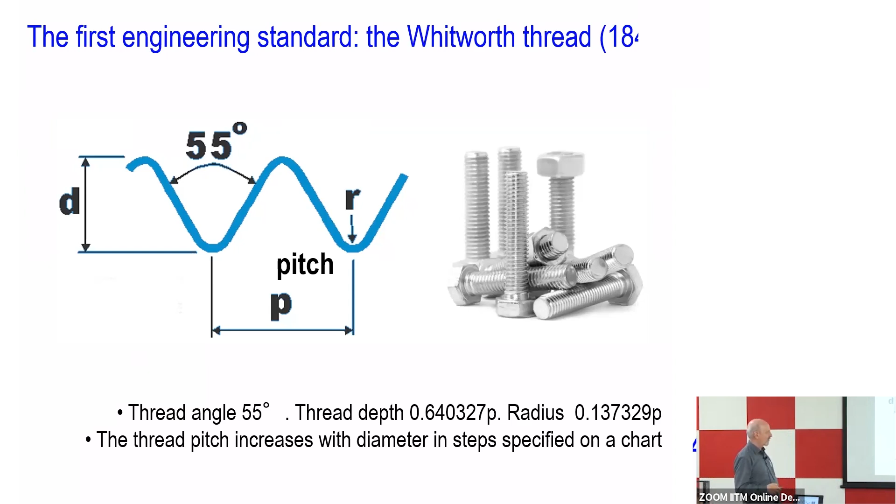Okay, so what a standard means, and I'm going to spend some time discussing with you what is a standard. So a standard originally means a banner, like you go with a banner and then the others follow you, and that's a standard. So in a battle, or in the past at least, everyone will look at the banner, whether it's there, whether it's not there, and that will orientate the different actions.

So that's why the term standards comes from the military world, but then also the meaning of it is all standing for the same, and therefore keep in mind that the notion of a standard also embodies a degree of leadership, okay? So if I propose a standard and everyone follows me, that means that I am in a position of leadership. If the French Revolution proposed the metre as the standard for a distance, then that means that, you know, they had a kind of leadership in the field.

And so keep in mind these two aspects. One of them is a standard is something that everyone recognizes as significant, and also a standard means that the one that holds the banner has a degree of leadership. So what is a standard in engineering? So there are some features of standards.

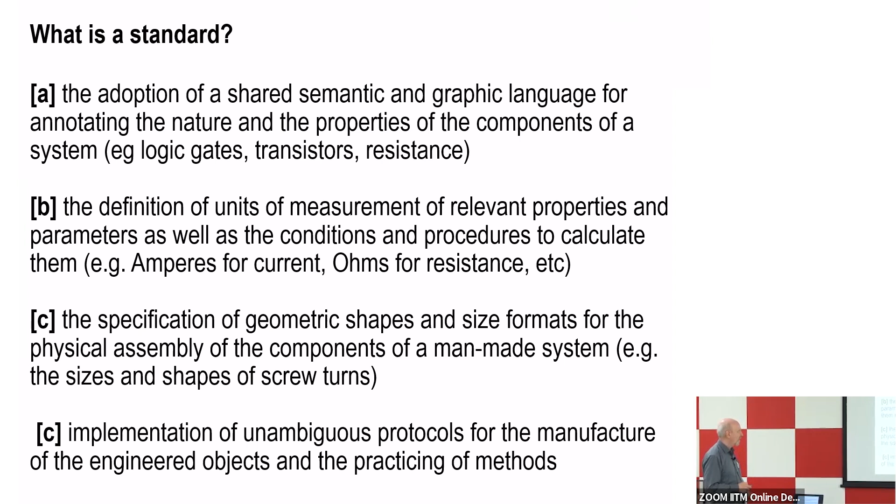So what are standards good for? And again, we are still in the realm of engineering. Well, a standard, first of all, enables the abstraction of the properties of the component of a system. If we say I have 5 amperes, you don't talk about the electrons, you don't think about the kind of material, but you just have that idea of amperes. They also enable a precise description of something in a standardized quantitative language. If I say the measure here is, I don't know, 70 centimeters, you know exactly what I'm talking about.

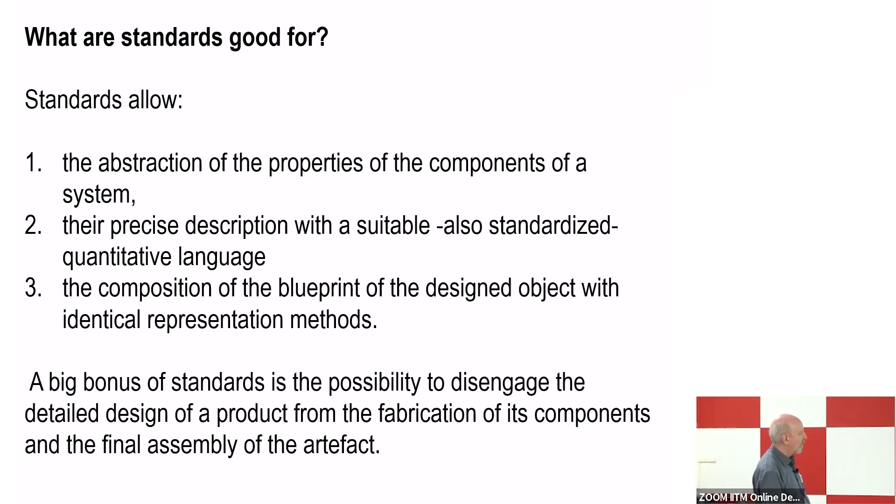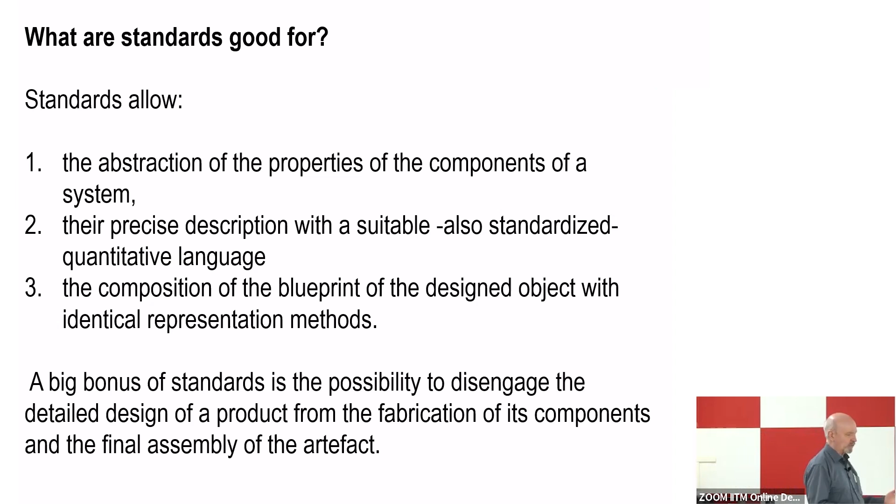And also, because of this graphical aspect of standards, you can represent the composition of an object with identical representation methods, okay? So if I make a logic circuit and I send it to China or to Singapore, it doesn't matter, they will understand exactly what is the content of that particular blueprint. And as I also mentioned in passing the first day, a big bonus of standards is that you can disengage the design of a product from the fabrication, from the final assembly, from the distribution. So this is something that is inherent to the value of standards.

So what things can be standardized? Okay, there are some things that can be standardized in engineering, and as you will see immediately, some of these things that can be standardized have an instant kind of projection in the biological world.

So for instance, you can standardize the physical assembly of the components of a system, for instance, geometrical shapes, dimensions, boundaries between elements, compositional rules. This is something that can be standardized.

Also, you can standardize the metrology, the way you measure things. You use a given technology to measure relevant properties, to calculate units, to give reference values, to examine tolerance and allowance. This is something important that I will return to in a moment. It allows you also to measure or to consider context sensitivity, transfer functions.

Okay. You can also standardize the manufacture of engineered objects. And there is an international organization called ISO, the International Standards Organization. That is the international body that will give a stamp so that industries can follow given procedures to produce given things. So you say, well, this object has been produced following a standard ISO 300-475. Then that is a very established procedure that can then be reproduced by many others.

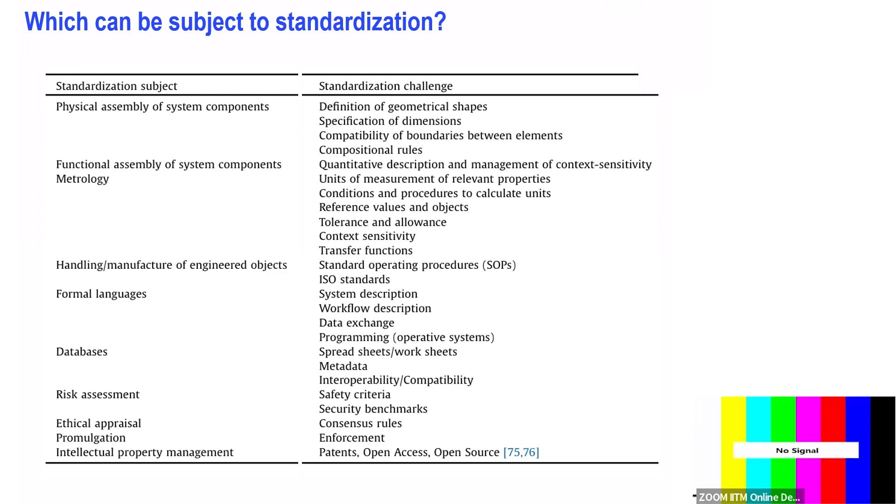And also we can standardize the way we handle intellectual property. And as you know, different treaties deal with knowledge protection through patents and open access and all these types of different agreements and so on.

So the essence of this is that you have a bunch of possibilities to apply standards to. If you apply them, then things can go much smoother, but there must be an agreement in the community to do that. And this agreement sometimes emerges from the bottom up, so it is the community that agrees to follow a given rule or a given standard, but sometimes it is imposed by brute force, okay?

And the typical example is the metric system, which was mentioned in passing the other day. The reason why we have the metric system in continental Europe is that Napoleon conquered most of Europe and imposed by brute force that all countries had to follow the metric system. Before that, every country had a different system. Spain had one, Austria had one, Germany had one. So he said, well, this is a mess. So from now on, either you take this standard or you might be in trouble, okay?

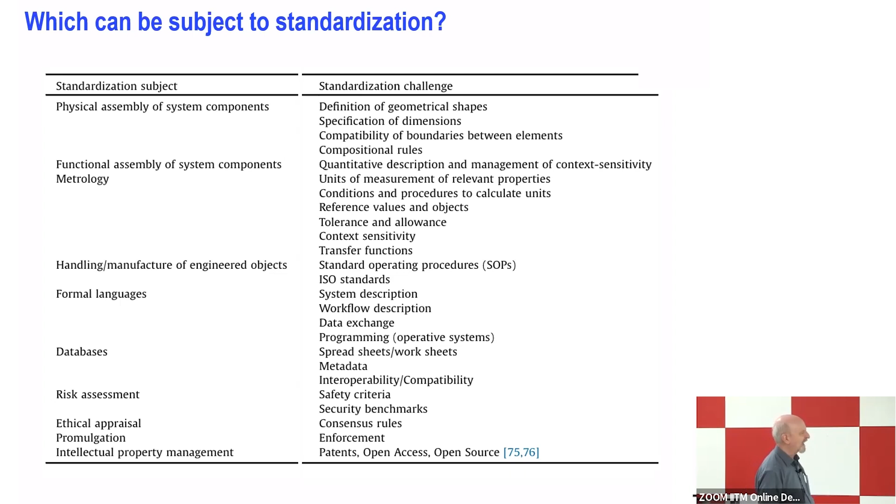And this tension between standards that go from the community up, and standards that are imposed by brute force, is something that happens also in some cases in synthetic biology, as you will see later.

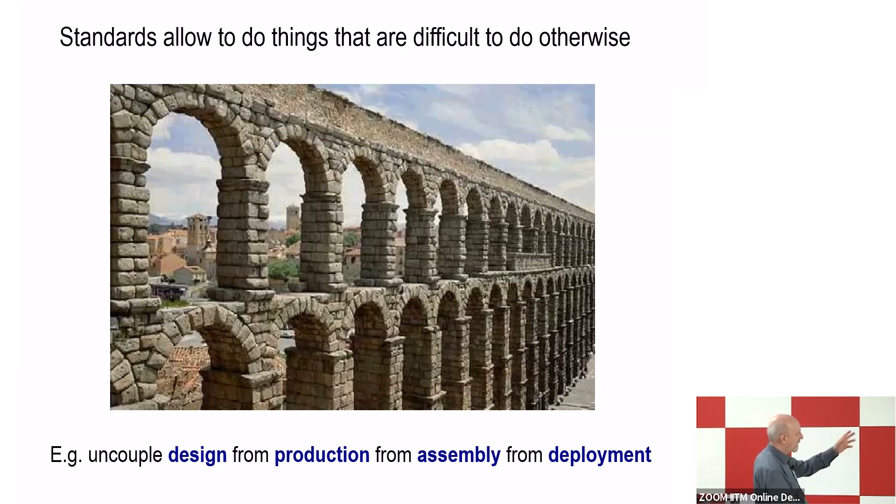I showed you this slide before. This is an early example of civil engineering. It's an aqueduct in a city close to Madrid in my country, in Spain. And you can see that every block here follows standards of size, of angles, of periodicity, and so on. And thanks to that, it was possible for the Roman architect to design the thing, to produce the stone somewhere else, to assemble them somewhere else, and then deploy the thing somewhere else as well.

Okay, so as a consequence of that, and this is something that I mentioned in passing the first day, you have to reshape the way you look at biological systems from the perspective of synthetic biology. In biological systems, the frame that enables us to understand what is going on in living objects is the so-called central dogma of molecular biology, where you have DNA, RNA, proteins, and metabolism, and a flow of information all the way from DNA to proteins and eventually to metabolism.

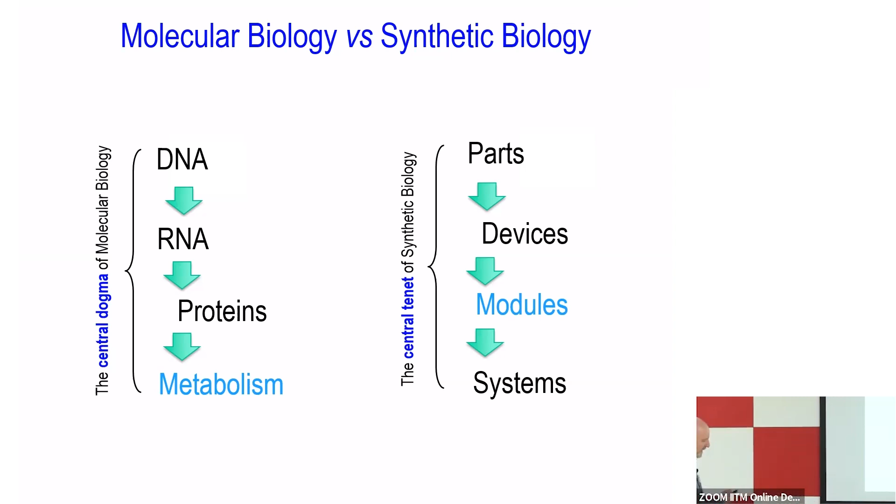Well, in synthetic biology, it's good that you keep that in mind, but this is not very useful. What is really useful in synthetic biology is this part here: biological parts, once they are composed, form devices. Once the devices form, they can be assembled to form modules, and eventually modules can form systems, okay? So this is a different perspective of the same thing.

And in practical terms, what you have, and this is a bit abstraction, then this is a lesser abstraction, still an abstraction, because you have this biosensor module that has the regulator that receives a signal, in many cases an inducer, and then it gives out pops, and then the pops enter into an operon, one or more genes, and then at the end you have a pathway. That is what you want, and at the end you have to have a terminator. So this is the kind of super typical, super basic synthetic biology device.

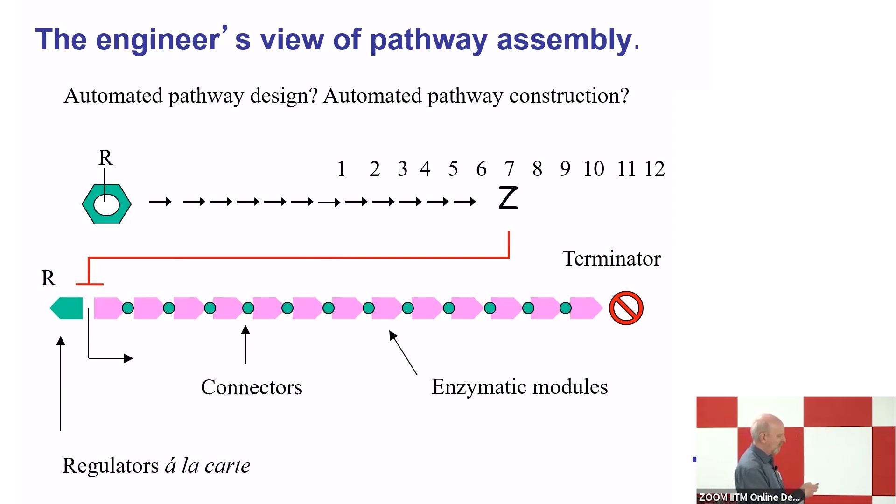You say, well, to go from this to here, I go to the literature and I need all these enzymes. I go to the genes, I clone them, I put them in front of a strong promoter, and bingo, it should work. Okay, well, this is in many cases what we kind of tell the world, but ladies and gentlemen, things are not so easy, right? So in many cases, we think that we are doing fantastic, but we are not doing fantastic, okay? We have to be careful about that.

Okay, why are we not doing very well? Well, mostly because of these four reasons. Number one, biological components are context dependent. I just mentioned that. Also, don't forget that we are talking about biological systems that are alive, and therefore they are subject to Darwinian evolution, okay? So that means that they can mutate, and the mutants in some cases can be more successful than the constructs that we make on purpose.

But also everything that we construct in a living system interacts constantly with metabolites and chemicals. So if we produce a protein, the protein does not appear out of the blue. It's all surrounded by a big concentration of other molecules, other chemicals, and other things.

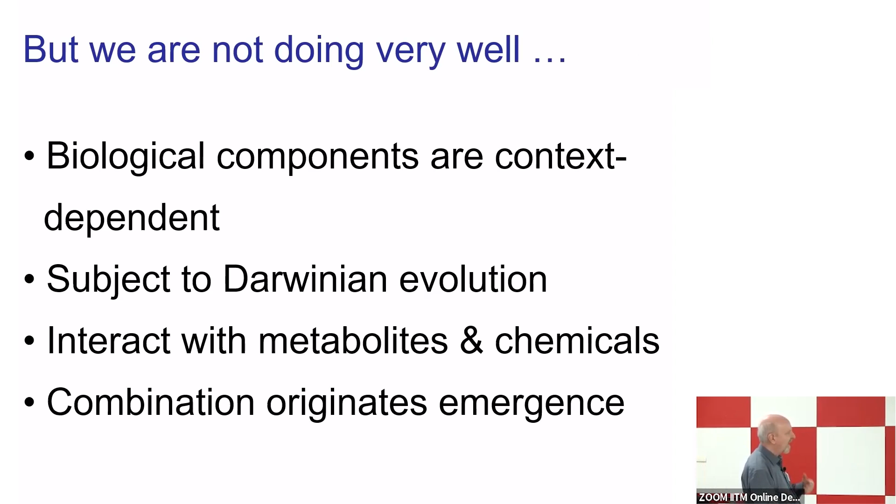And what is more worrying is that in biology, combination originates emergence. So it's not just that we have context dependency that may vary a little bit the input-output functions, it's that sometimes when we combine biological components, the outcome may be completely unexpected. So it's not that one thing is a little more, a little less. So this is a serious problem, a fascinating problem that goes as follows.

In mathematics, 2 and 2 is 4, okay? No discussion about that. In engineering, things are not so, because, for instance, when you make a screw turn, if the receiving part had exactly the same dimension as the other, it would not work. I mean, you need to have some little space between the two to make them fit.

This is something I will return to in a moment. It's connected to the allowance of standards, but in engineering, things are close to mathematics, but they're not mathematics. But in biology, 2 plus 2 may be 4, but then you have this phenomenon that is emergence. Emergence is that you don't know what's going to happen. You cannot predict what's going to happen when you put these 2 plus 2 together.

So sometimes you combine one gene and another gene, and you think that something is going to happen, and what happens is something completely different. You put this enzyme and this other enzyme, and you predict that the result of these two steps will be one specific reaction, and then maybe the first enzyme will kill or inactivate the other. In other cases, it will activate the reaction, and in other cases it will originate a completely novel reaction that has nothing to do with the ingredients. So this is emergence, okay?

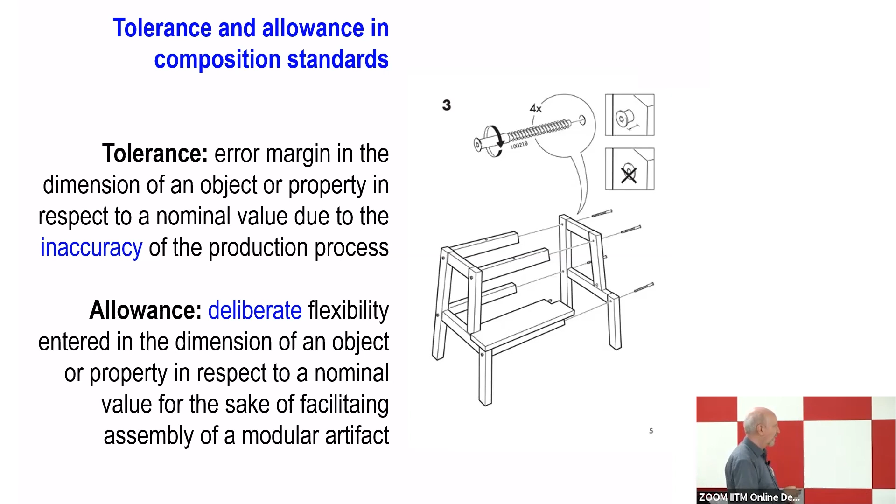But then we have this other aspect that is called allowance. So allowance is a deliberate flexibility that you enter in the dimension of an object to make sure that the two things fit together, okay? So when you have a screw component, and you have the receiving hole of the screw, if the two were absolutely identical, the system would not work. You have to leave a little room for the two things to go one after the other, okay? So this is something that engineers have known for a long time.

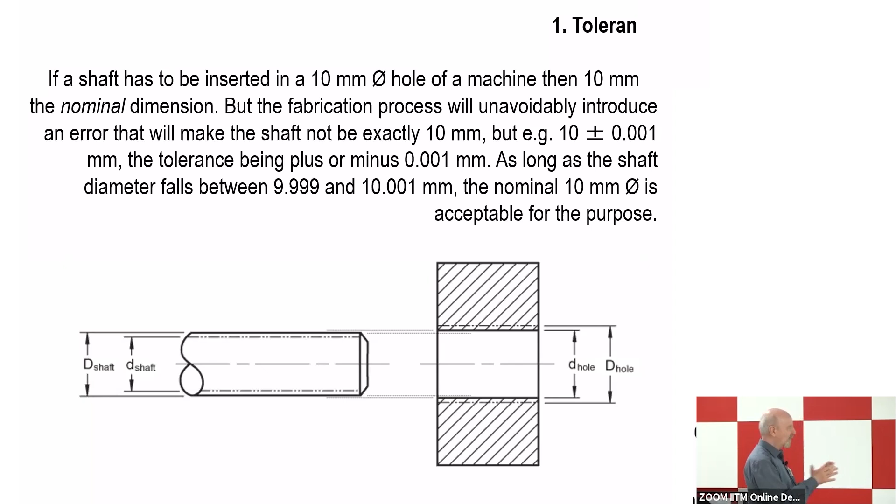And the thing is that, for instance, if a shaft had to be inserted in a machine and 10 millimeters is the nominal dimension, number one, there will be some error, and therefore the system has to be thought to tolerate the kind of error margins that are associated to the production process. And then by the same token, and I don't want to go in detail through this text, in many cases, to make the system work, you have to allow some margin, not of error, of room for the two things fitting together, okay?

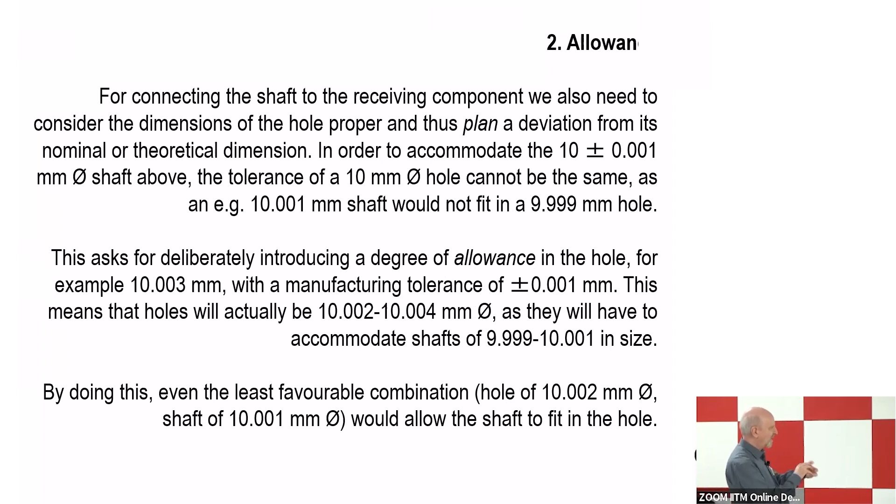Okay, this is for mechanical engineering, for electric engineering, and for the kind of engineering that we know on a daily basis. How can we translate this to the biological world? Because obviously, if we're talking about standards, we have to consider all these circumstances. Okay, so let's recover again this metaphor of the radio built with parts and see how far we can project these ideas about engineering standards to the biological world.

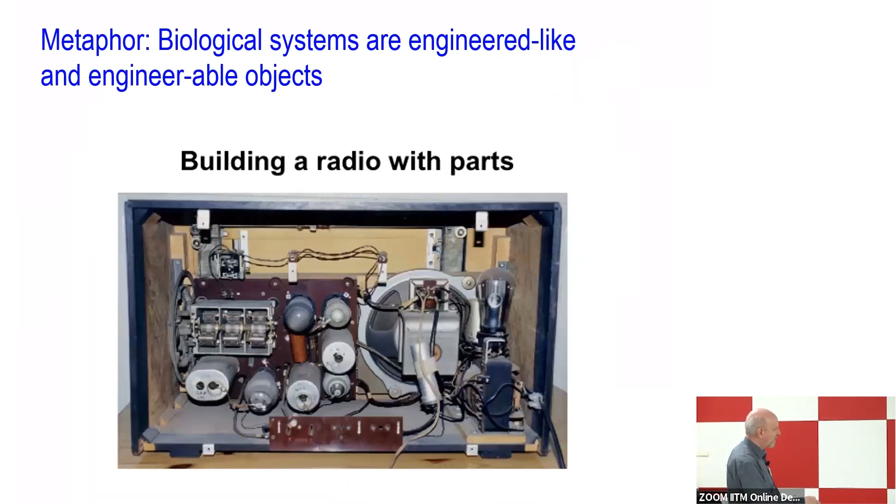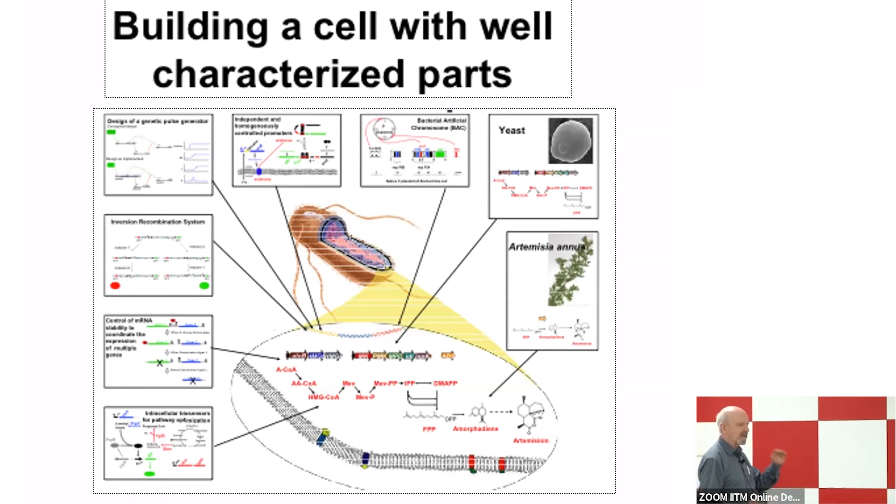This slide that I also showed the first day indicates that the radio has many components, many parts, and also cells from the perspective of synthetic biology can be understood as a bunch of structured, well-organized and well-characterized parts, okay? So in this case, the parts are transistors, cables, connections, bulbs, and then you have this speaker. Then in the case of a cell, you have genes, I'm sorry that the resolution is not good, but you have different types of molecules, you have controlling elements, you have a list of them, and the list is very long, but it's still limited, it's not infinite.

Okay, so we return to the star concept in synthetic biology, that is the concept of parts. So what is a part? A part is a DNA sequence that encodes one non-equivocal biological function. It has to be one, it cannot be 20, it has to be one. But from the perspective of synthetic biology, this is not enough. So the part has to be endowed with additional properties.

Number one, the part has to be composable. That means that the part has to be designed to make it amenable to further composition with other parts, with other segments of DNA. It has to be reusable. Reusable means that the part is good not for one specific purpose, but one day I use it for making this construct, then I take the part some other day to make another, and another, and another.

I can reuse the same part for various purposes. If I have a promoter, then I can use that promoter part for expressing, I don't know, beta-lactamase, but tomorrow I want to express a pathway for degradation of xylene, and then I can use the same promoter, and the other day I want to do it for expression of genes that deliver at the end some synthetic material. Okay, so it's the same part, and we use it in different contexts.

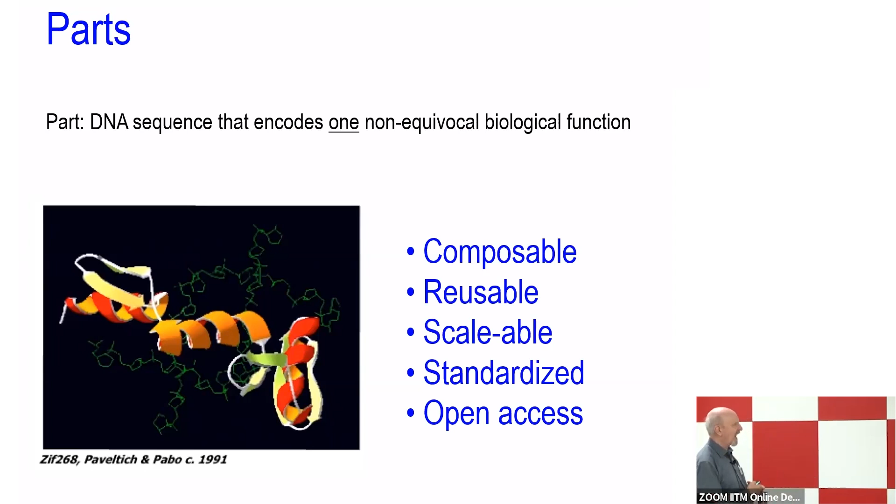Then it's scalable. Scalable means that you can use it in many different places. It has to be standardized, and I will return to that. And also, and this is important, it has to be open access, okay? Well, this is not obligatory. I wish it were obligatory, but it's not. But in general, the community of synthetic biologists advocate, including myself, that biological parts that are standardized should be made available to everyone without the limitations of intellectual property, patents, and all the rest of it.

So what is in a part, okay? In a part, you have basically three things, three contents. First, the DNA sequence, of course. If you don't have a DNA sequence, you don't have a part. Then the function associated to the DNA sequence, and also the activity figure. And the activity figure is a very important characteristic of a biological part, because if not, you are not in synthetic biology, you are before synthetic biology. So you need to have a sequence, a function, an activity figure.

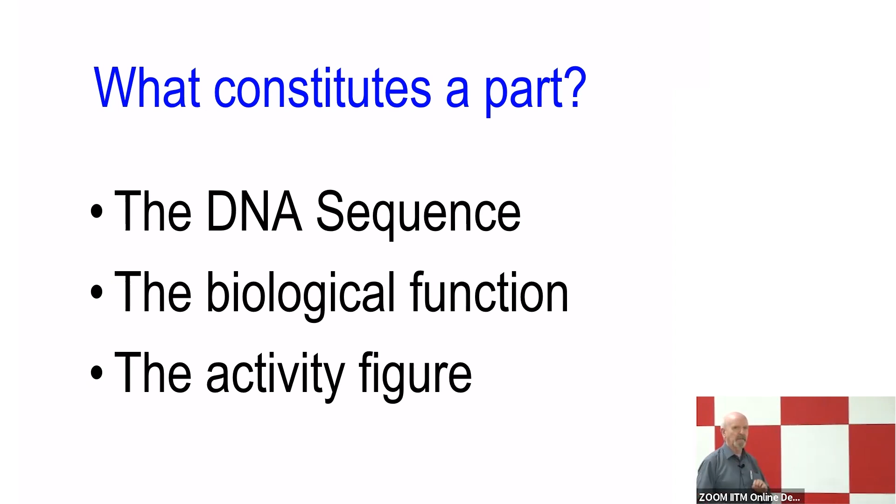For instance, I have this sequence of DNA. The biological function is a promoter, and the activity of this promoter is 2 PoPS. That's a super wonderful part. It's super well characterized, okay? So I'll show you how these parts can be abstracted and how far you can get with this type of definitions. And also, as is the case with electronic components, you can give them a code. So you have a list of parts that are encoded, not with the whole sequence, but just with a name that, again, is standardized and enables you to handle them very easily. So this would be the perfectly defined part, okay?

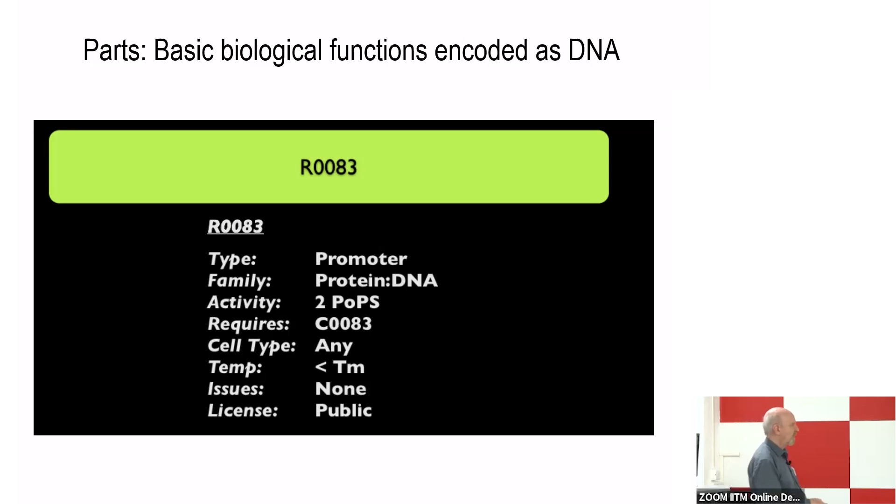So you have a sequence of DNA. The function is a promoter. The family it belongs to is the DNA-interacting proteins. The activity is 2 PoPS, then it requires this other part to be assembled. Probably this part is a plasmid or something, I don't know. Cell type, any, that means that it can go in any biological system. Temperature appears to be kind of lower than room temperature. Issues, none known. In principle, no one has found any problem with it. And then public, that means that everyone can use it, okay? So this is just one part. There are thousands and tens of thousands of parts that are characterized under this kind of nomenclature.

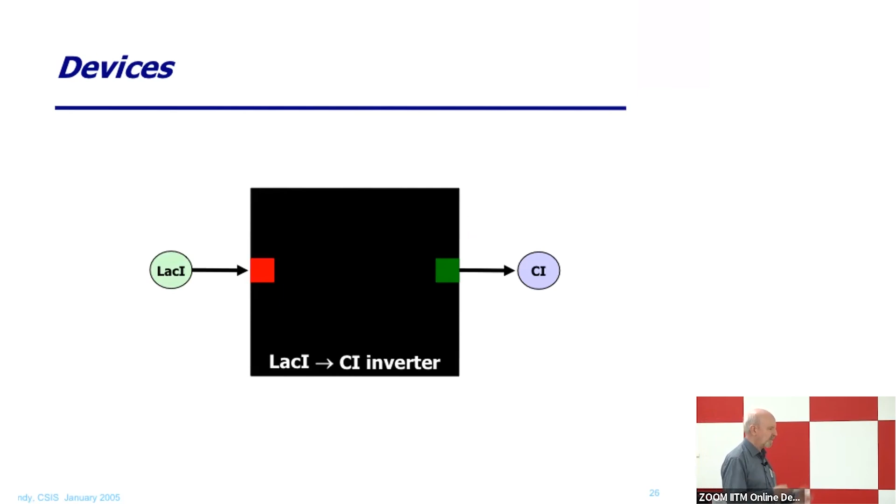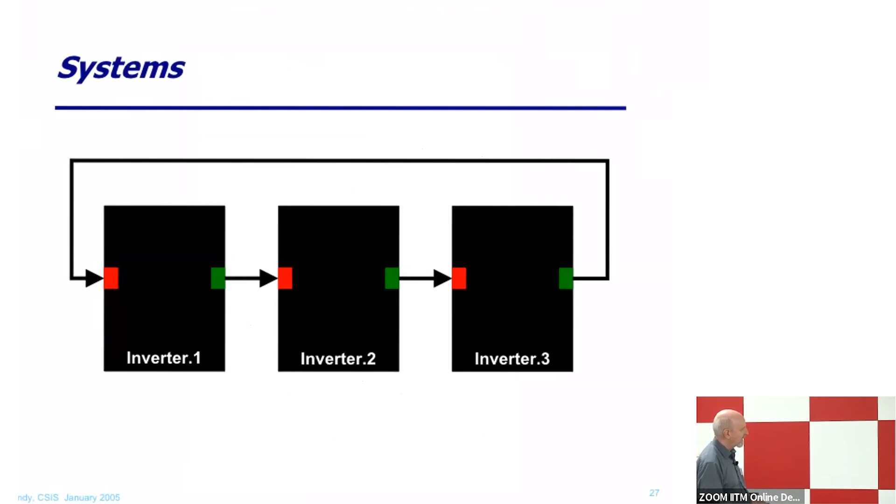Well, there are various initiatives, mostly in the US, with this idea of collecting thousands and thousands of parts and characterizing them in terms of inputs and outputs. This obviously for a human is impossible. It would be very boring to spend all your time making this type of characterization. But many of these operations to define the input and output values of a given device now can be run by a robot, in such a way that at the end, for every part, and there are thousands of parts, you can have a kind of information page where you can monitor and visualize all the characteristics and all the parameters associated to that part. And then with these characteristics and parameters in hand, you can go on and make devices and the rest of it.

So what I have told you so far is connected with the standardization of parts. But there are other aspects of synthetic biology that also deserve and have been standardized. One of them is the language. The main language for describing synthetic biology constructs is the so-called SBOL. SBOL means Synthetic Biology Open Language, and it is a language that has different degrees of depth, and is very useful because it enables you to describe genetic constructs with a language that can be understood not only by humans, but also by machines, by computers. So that's something that is very useful.

And the SBOL language is becoming more and more used by the community to have an accurate description of different procedures and different parameters associated to a given biological construct. So instead of having this soft wording of some biological phenomena and properties, with SBOL we have a very precise description of what is going on. Not only that, but there are some initiatives in the last few years to convert the SBOL language into a language that can be fed to a robot to run experiments itself. So instead of doing the experiments ourselves, we code the experiment in this language, and then a robot can run the operation without any human intervention.

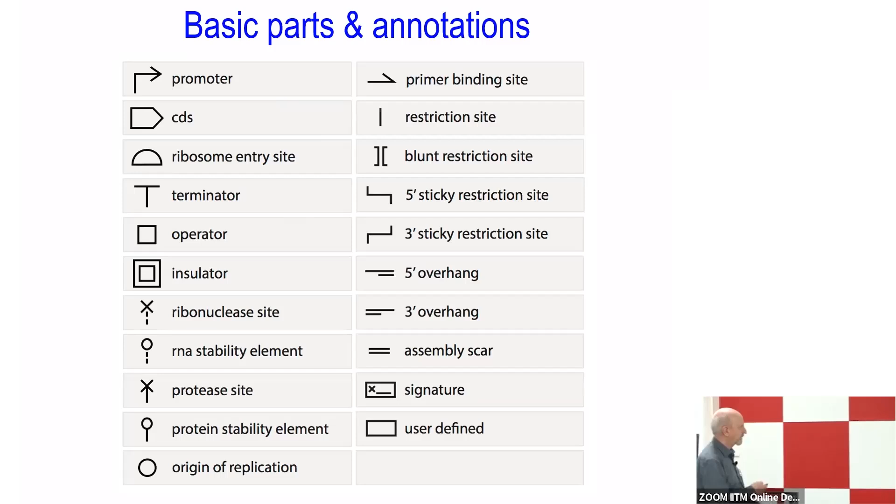So that means that when you say, well, I have a gene, I have a pathway, whatever, you should not use any representation that you fancy. Please always use standard annotations for graphical representation of your constructs, because that enables you to communicate the contents of your constructs to a much wider community that will not be confused by some whimsical symbols. Okay, so the next screw turn is that we have defined the parts.

We see that the parts have to be standardized, that there are some kind of characteristics and so on. But then where do we find the parts? Basically, parts can be made by any laboratory and you can have them, etc. But there is a major repository of parts that is found in association to iGEM. I will go to that in a moment.

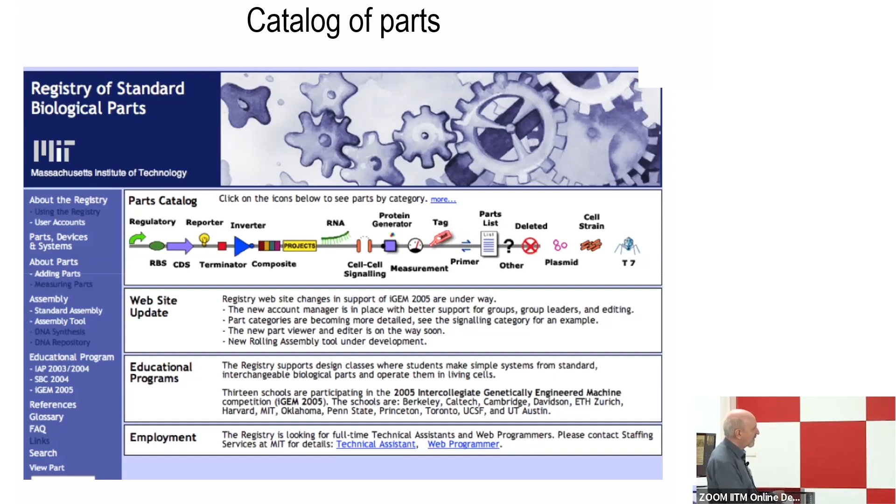But there are catalogs in which you can find different categories of parts standardized in a way that enables their assembly and so on. And the most famous of all of them is this Registry of Standard Biological Parts. You can go in to find out what they have in this page here. At the end, I have a number of web page links that you can check. And it's constantly updated.

What you have there is an immense collection in the order of thousands, tens of thousands of different parts that the community has developed over the years following these rules about having a DNA flanked with other enzymes that enable their composition and so on. And that's something that is very, very useful.

So for instance, what type of parts do you have there? You have many, many different categories. You have some collections, for instance, of promoters, more or less used parts, reporter proteins, quantified promoters. You have a whole bunch of them, and this is just a screenshot of a web page, and if you go one by one, you will have exactly all these things.

And also, what is interesting is that in this registry, you can get the rules for producing these parts. So if you, in your laboratory, develop another part and you want the part to be considered a synthetic biology part, then you have to follow these rules and eventually add that part to the collection so that everyone can start using it for different purposes.

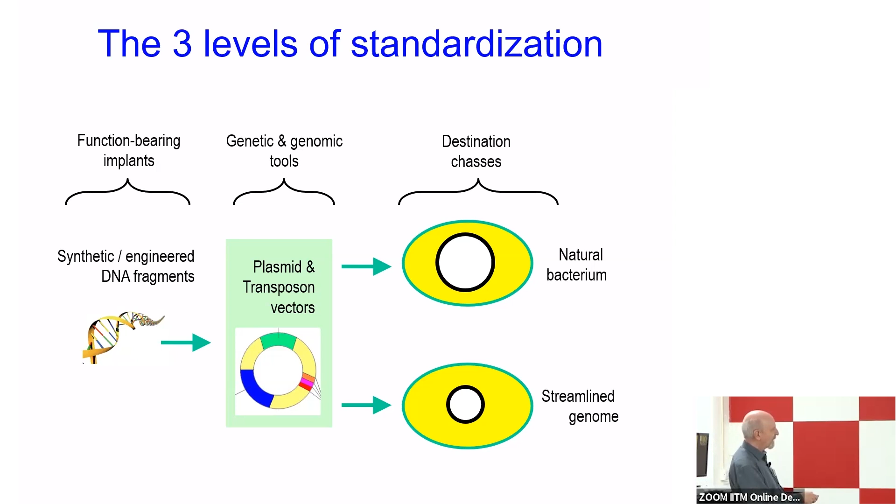The other thing that can be standardized, which we will spend the rest of today talking about, is genetic tools. Genetic tools can be standardized very well, and you will see the advantages. And what you can also standardize, and we had a big discussion on that in previous days, is the destination chassis, whether the recipient is a natural bacterium or one whose genome has been remodeled or rewritten to receive specific vectors that in turn contain specific engineered fragments of DNA.

So that's how things would go in the case of the BioBricks standard. And I leave you with this slide that we will discuss in detail in the second part of the class today. Okay. Now we have a 5 minute break, and then we go back into this story about the SEVA platform.